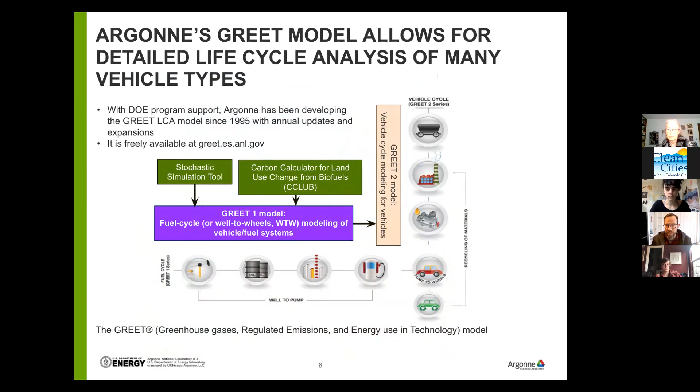That tool allows us to look at all of the energy and materials that go into cars, right? So you have gasoline in a conventional combustion engine vehicle. And that gasoline is extracted from the earth, it's processed, it's refined, it's moved to a distribution site where it's then, you know, eventually put into your vehicle, and then you drive it. Your vehicle is comprised of lots of different materials, a lot of steel, a lot of aluminum, things like that.

But now, as we talk about battery electric vehicles, we also have battery materials that we have to be concerned about. And so we look at all of those. We have all of that information available from public documents, from technical analyses that we've conducted, and collaboration with OEMs, original equipment manufacturers of vehicles, with a lot of industry groups and things like that. So if we go to the next slide.

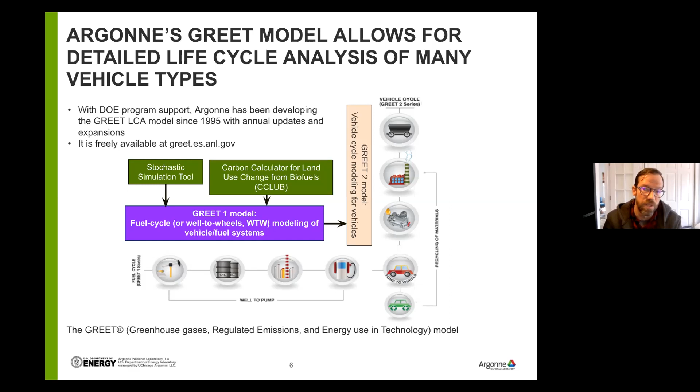When it comes to batteries, the big issues that we're seeing are lithium, nickel, and cobalt. The 2 main battery chemistries that we're seeing in light-duty vehicles are variants of the NMC, which is short for nickel, manganese, cobalt. So the precursor to all of those is that there's a lithium in front. So it's lithium nickel manganese cobalt oxide cathodes. But the variants of NMC are just how much nickel, manganese, and cobalt are relative to each other. The other is NCA, which is nickel, cobalt, aluminum. And those are the Tesla batteries. So just so you know what we're looking at, those are the different chemistries.

So most folks, I think, at this point have started to hear something about the issue of cobalt. It's a key element in those different battery chemistries. And there's a worldwide effort to reduce it for a number of reasons. One is that it's mostly sourced from a politically fraught environment, that being the DRC, the Democratic Republic of Congo, which has political issues, human rights issues, and all of those things, outside of any sort of moral observation on any of it, it creates volatility.

And the last thing that OEMs want is volatility in prices. They like assurances. And so that's one issue. And it also creates potential for scarcity. So those are things that are a concern.

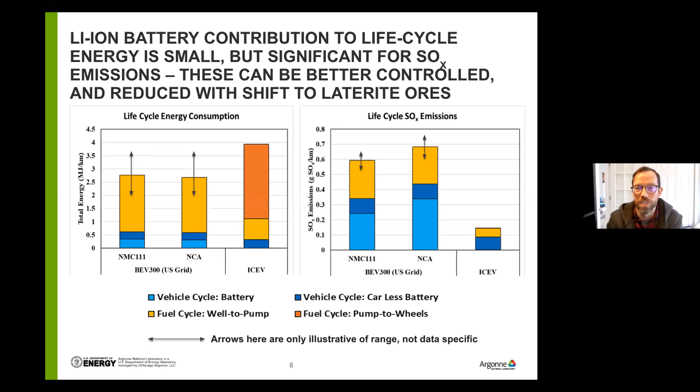And I present these two figures to highlight something. If anybody tells you that they are more sustainable, they're not telling you the whole story, because it's always a multifaceted answer. Sustainability is always multifaceted. Are we talking about greenhouse gas emissions? Are we talking about SOx emissions? Or what are we talking about? So we have to be very careful in how we talk about it. And I think sustainability being lumped as a single term can be an oversimplification. Next slide, please.

So we've looked then also at the issue of equity, and in particular, how used plug-in electric vehicles can be a form of improving low-income household mobility. So how can this be a platform?

And what are the barriers towards this low-income household mobility through used PEVs? And what are the potential incentive programs out there?

So just broadly speaking, this figure was developed by one of the researchers at Argonne, showing simply the savings that American households received over the course of just a 2-year stock weighted difference of the vehicles that are operating in the US. This isn't related to electric vehicles, but what you can see is that $8.2 billion were saved in just use phase spending by Americans from 2016 to 2018, based on improvements in fuel economy.

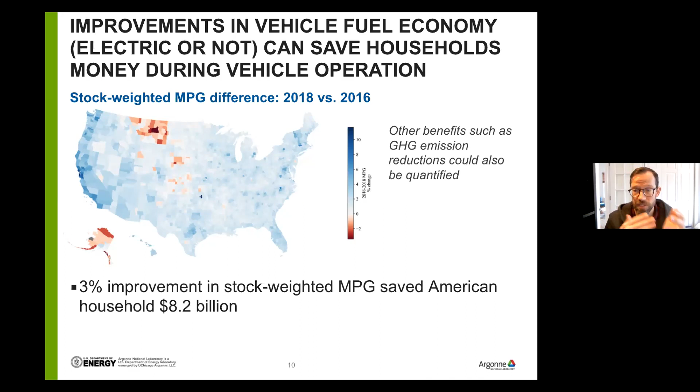And you can imagine that if you have an ICEV, that you're going to improve significantly more if you move up to a battery electric vehicle, because their electricity is less expensive, and on a use phase basis, they're less expensive to operate.

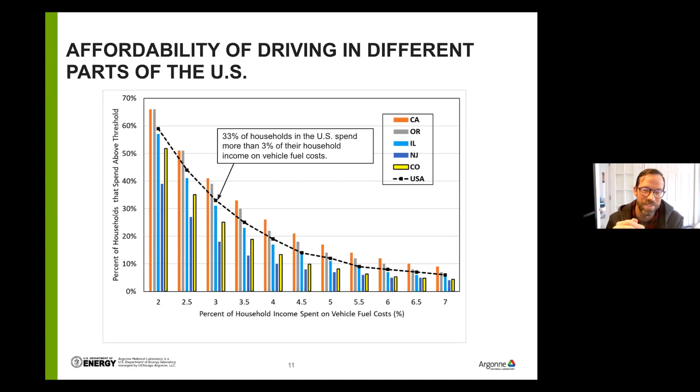So when it comes to used PEVs, a little more specifically, the issue here that sort of motivates some of this is zero vehicle households are most likely to exist for those households that are at or below the poverty level, the federally mandated identified poverty level.

And so the thing that we know about transportation is that it's crucial, right? It's crucial to obtaining important services and amenities. And I think most critically is it's really imperative to be able to get to employment. So that's one critical aspect of why this is something that we're very interested in.

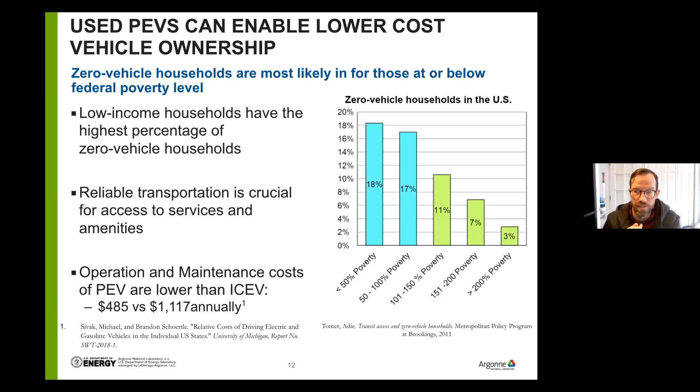The other thing I think that helps motivate this is, as I alluded to before, is that the operations and maintenance costs of plug-in electric vehicles are lower than they are for ICEVs, and significantly lower, meaningfully lower.

Now, if we look at the used EV market, I just went and looked at Carfax, grabbed a nationwide sample, and looked at a 2017 Nissan Leaf compared to a 2017 Toyota Corolla. Everything that I looked at was under 30,000 miles with no accidents, and what were the lowest available pricing groups, not just a one-off that's really cheap, but pricing groups. And you can get a 2017 Nissan Leaf for $9,000. You can get a 2017 Corolla of the same specs basically for $11,000.

So you're actually able to get into a used PEV for less money than you can get into a used ICE vehicle. And I'm not saying that $9,000 isn't a lot, especially as I was highlighting for households at the poverty level. But it does highlight that used EVs don't have the same sort of burden of upfront costs that we think of when we think of BEVs.

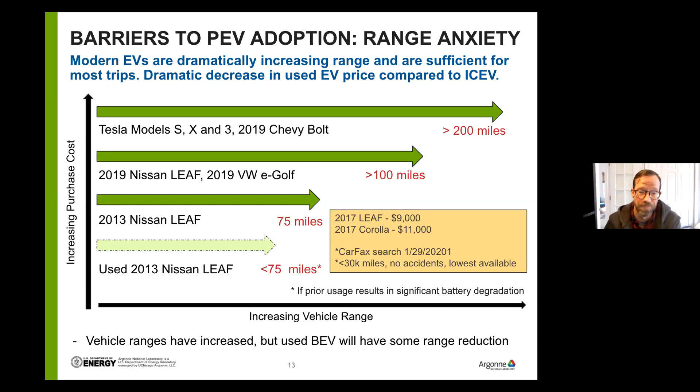The other really, really big issue that's been highlighted over and over again is the availability of charging, right? So charging is largely something that's available to households that are single family detached households and some sort of attached kind of household opportunities. But when we think about apartments, when we think about multi-unit dwellings, those are more likely correlated with low-income households, and they're the least likely to have available charging.

And so the only thing available to those folks is public charging. And so expanding charging availability at multi-unit dwellings is one thing that can be highlighted as a must-do if we want to talk about opportunities for increasing equity in this area. And I highlight that, but I think it's also really important to engage with those communities to make sure that we're addressing their needs.

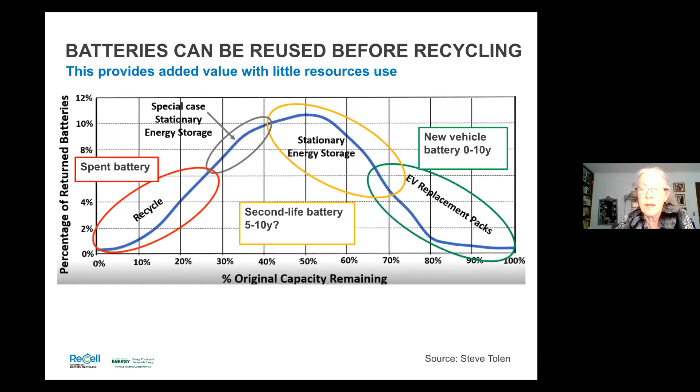This is all consistent with the circular economy. You want to be able to keep materials in use as long as you can to minimize the life cycle impacts of whatever it is you dug out of the ground and have been using. So reusing something is a lower impact activity than breaking it apart and recycling it.

Each of those layers is a different material, which means recycling it is much more complicated than just recycling your magazines or something like that.

You can put a single cell in something like your phone. You might have two cells in your laptop. In a vehicle, you've got a bunch of cells put together into groups called modules, and those modules are put together into a big pack.

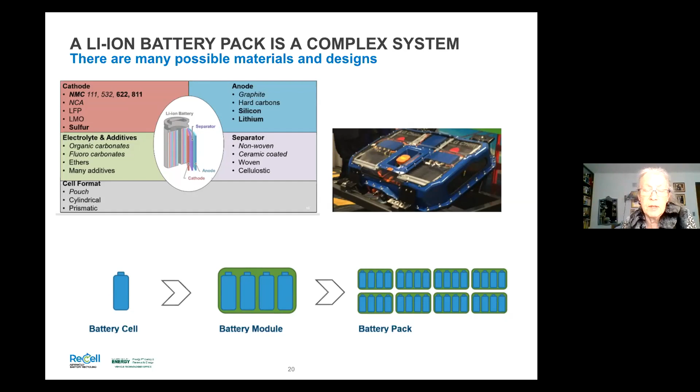Once a battery gets to its end of life in your vehicle, people need to test it and see how good it is so they can figure out where to go. What's likely to happen is you'll take the battery pack apart into modules, not all the way down to cells, because that ends up being very labor intensive. A Tesla might have something like 5,000 cells, and they might even be glued into the module, so taking it apart is just not going to be worth the money in labor.

So the modules then get graded to see which ones are good. If they're really good ones, you can put them back into a battery pack to put into a car whose battery has failed, or you can put good modules or less good modules into a second life application, depending what you want to do with it. Or if it's not really very good at all, you'll just send it to recycling directly.

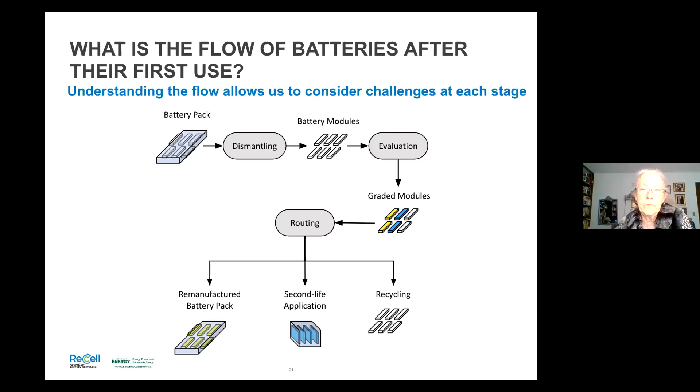So what do you do with a second life battery? One thing you can do is put it in a big stack of batteries and give it to the utility company. If you've got solar energy building up during the day but really need power at night, you can store the energy in this pack of battery packs.

Or you can take it and put it in a remote charger. If you do that, you can again store solar energy you've collected during the day and charge batteries at night off of this charging station.

One idea we had, which you're welcome to try and we can help with, involves a bus company that's putting in electric buses. They have enough charging stations in their depot to charge something like 6 buses, but they're about to get more buses and don't have the capacity. If they put in more chargers and used grid power all at once to charge the batteries, they might run into extremely large demand charges for taking a lot of power at the same time.

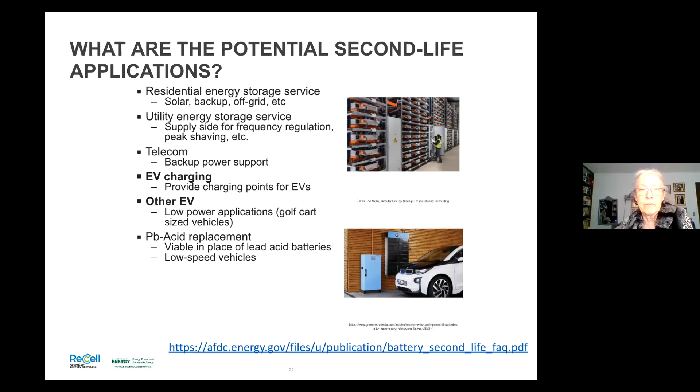We were also asked what happens to batteries that reach their end of life. First, note that in the United States, essentially all batteries that have reached end of life so far are from portable electronics. There haven't been that many EVs in service for 10, 12, or 15 years, so they haven't really gotten to their end of life.

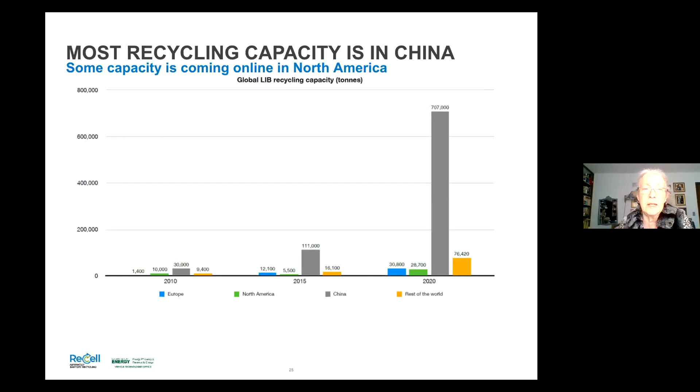And the interesting thing also that comes straight out of the math is because the growth of electric vehicles, and because of that battery manufacture, is so rapid, it turns out that recycling plants will have for quite a while now as their main feedstock scrap from manufacturing. And that's just because there's so much more material being manufactured right now compared to 10 or 15 years ago. Next.

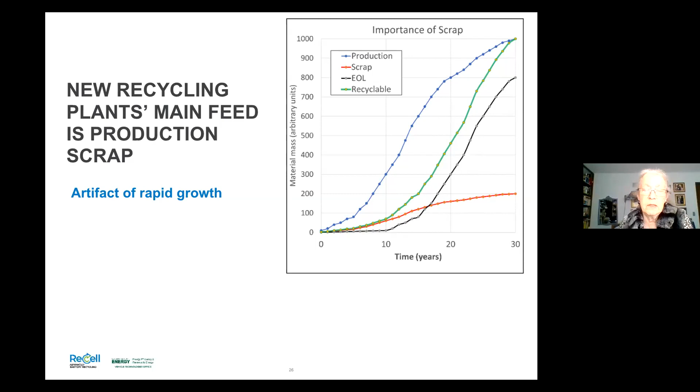So Jared mentioned cobalt. One of the main functions that DOE has in order to reduce the US dependence on critical materials is to reduce the amount of cobalt in batteries. So that's a major research effort for the Department of Energy. They've also got a battery recycling prize. Basically, when we started looking at how the batteries were going to be recycled, they figured out that you didn't have to worry about how they were going to be recycled if you couldn't get them back in the first place. So the battery recycling prize was established to figure out how to get all of these batteries back.

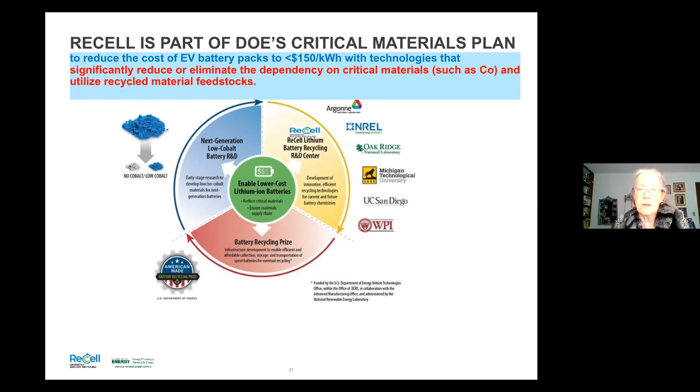And finally, the third part of their program is our ReCell Center, which is a $15 million over 3-year collaboration with 3 national labs. Argonne is the lead lab. NREL and Oak Ridge also have important parts. And we also have 3 university partners that are doing very interesting work. And the center's mission is to come up with an economical way to recycle lithium-ion batteries from vehicles within 3 years, start taking cells and recycling them to get new cells. Next.

Now, it's not that nobody knows how to recycle batteries at this point. There are 2 commercial processes. Pyrometallurgical processing: basically you take the battery, you throw it into a big furnace, treat it like an ore, and you get back to that refining stage. Or you can take the battery, chop it up, dissolve it in strong acid, and you can get back precursors to battery materials.

What we want to do is actually get back the valuable internal materials from the battery with their crystalline structure intact so that we can avoid doing the energy-intensive steps that need to get repeated from the other processes. And that again is one of those smaller circles that's better for the environment from the circular economy methodology. So we're working on that, and we've got a number of processes that we're working on to get material back that will be attractive to battery manufacturers. Next.

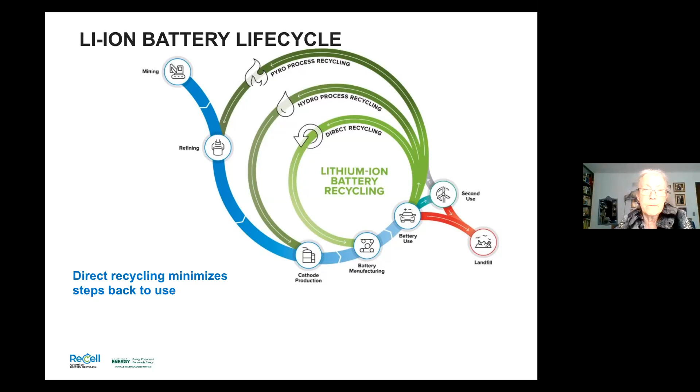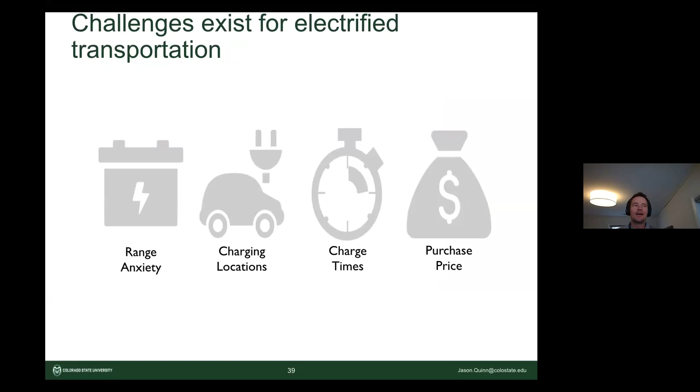So a lot of you, especially in the first poll, right, on the next slide, have identified the issues. And if you click through these animations, they'll show up quickly, right? They're all the things everybody knows and loves, right? Can I afford it? Where do I plug it in? How am I going to get there, right? And these are all real things. The problem is that a lot of what we perceive isn't necessarily reality, right? In terms of range anxiety, for example.

COVID's unique, but I think the furthest I've driven during COVID is like 3 miles, other than going to the mountains to ski, right? But you know, otherwise, I'm just really wearing out the sidewalks these days.

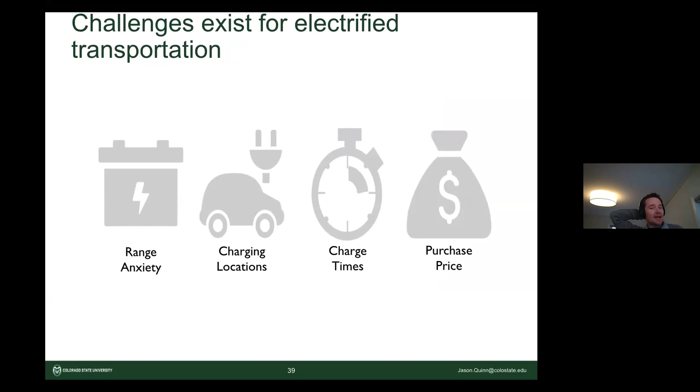This is in-motion wireless charging. And so the concept is, like I charge my phone on a pad wirelessly. Well, let's just elevate it and just drive it at 75 miles an hour across the interstate. Kind of a cool concept. A lot of challenges, but something that's kind of cool.

And it addresses a lot of those anxiety things that we've talked about, but it's a huge infrastructure investment. But it's okay, we've been there before. So what are we doing to investigate this?

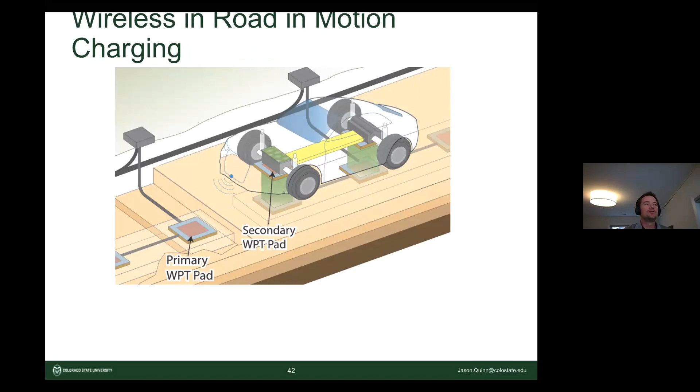So if we click forward 2 slides, my work focuses on the optimization of systems considering sustainability. So I'm really grateful to the DOE for 2 reasons. One is they give us a lot of money to look into this, but 2 is no matter who is in the administration, they care about 2 things. It's a matter of what comes first: economics and environmental impact. So the last 4 years, it's been in that order. In the next 4 years, I'm predicting it's going to be environmental impact and economics. But this is the core expertise that we play in.

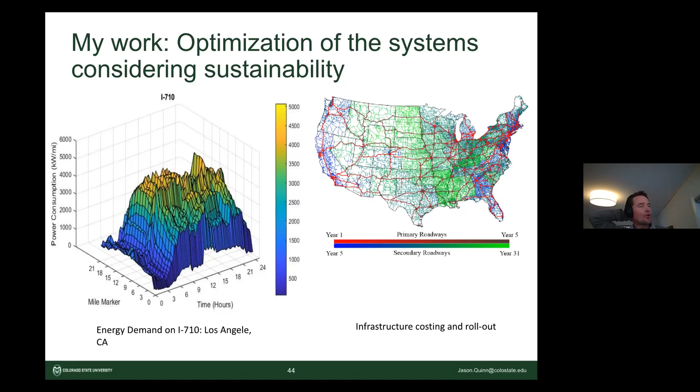If we go to the next slide, we're going to talk about environmental impact. So just confirming everything Jared said, hey, SOx, it's an issue, right? But GHGs are not. And so it depends on what we care about. So if we click go again, check it out. Here's the answer for the takeaways, right? Yep, there's a huge reduction in greenhouse gas emissions. But as Jared said, that's not the whole picture. It's a big part of the picture. And so as we move forward, we can start to use this information to try to make intelligent decisions.

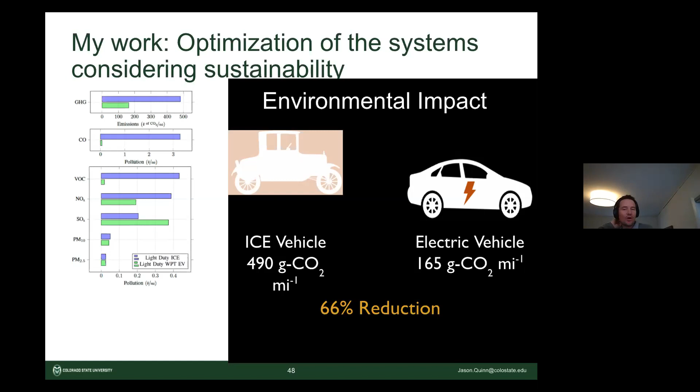And so what I'm trying to convince you here of is that the future is uncertain. There's no doubt. If I knew what it was going to look like, I'm not going to lie, I wouldn't be here hanging out with y'all, right? But that's one of the reasons why we do the work we do, is we're trying to look at what the options are and what's going to be ideal.

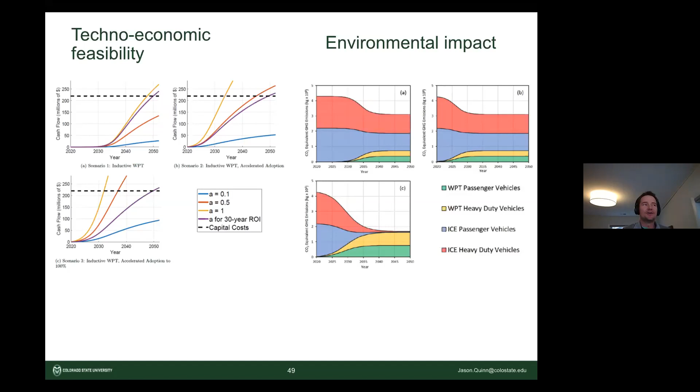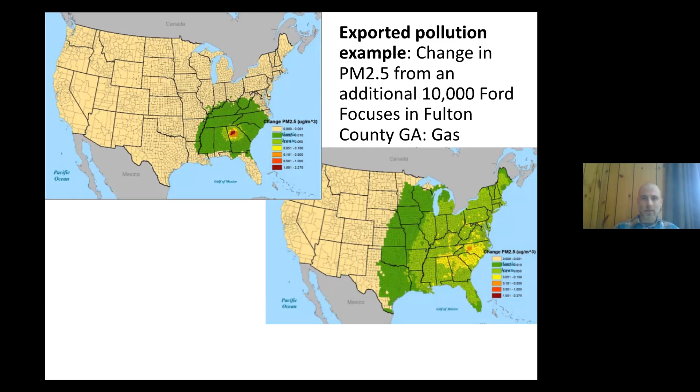Okay, so the bottom line policy result, if we're thinking about how to incentivize purchases of electric vehicles, is the optimal EV subsidy should be equal to the difference in lifetime damages between an electric vehicle and a gas vehicle. So if we were to subsidize electric vehicles, economic theory would say that we want to make a person just indifferent between purchasing the gas-powered versus electric vehicle, maybe pushing them slightly over to the EV side. And this paper asks, what are those lifetime damages and how do they differ by region of the US?

Oh, I see. Gotcha. Screen now? Mm-hmm. Good to go. Sorry about that. My sincere apologies. You go through Zoom, Teams, Blue Jeans. They're all different in what you do.

Okay, sorry about that. So what I was pointing to is PHEV30, BEV, and ICEV right here. So these are just the greenhouse gas emissions. So you can see that they are very comparable in terms of the energy. And I'll throw a link to this paper in there. But we've got more up-to-date versions of this too. This was just easy to access.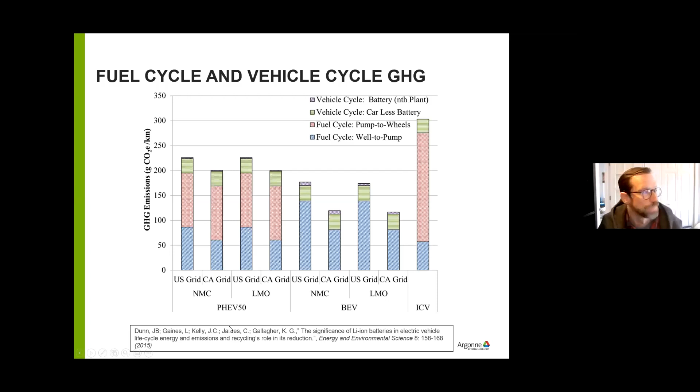Great. This might have been directed at Linda, but maybe all of you have an answer for this. What other chemistries or materials are being explored in lieu of cobalt? Well, the Nissan Leaf was a lithium manganese oxide chemistry, so there's no cobalt in that one. A lot of the Chinese cars and some of the ones that Tesla says it's going to make are lithium iron phosphate. Again, no cobalt. But for high performance passenger cars, nobody has yet produced one that doesn't have any cobalt in it.

The Chevy Volt was an NMC 111, which meant it had equal amounts of cobalt, nickel, and manganese in it. What they're moving towards now is, as Jarod mentioned, higher nickel, and a typical one that people are talking about is 811, which has 8 times as much nickel as cobalt or manganese. And in fact, DOE's doing some research on chemistries that have half as much cobalt as that in them.

So it's coming. I don't know how much cobalt's really going to be used when, but one thing to note is the total amount of cobalt that we're using, even as the amount per battery decreases, is still increasing because the number of batteries is increasing so fast.

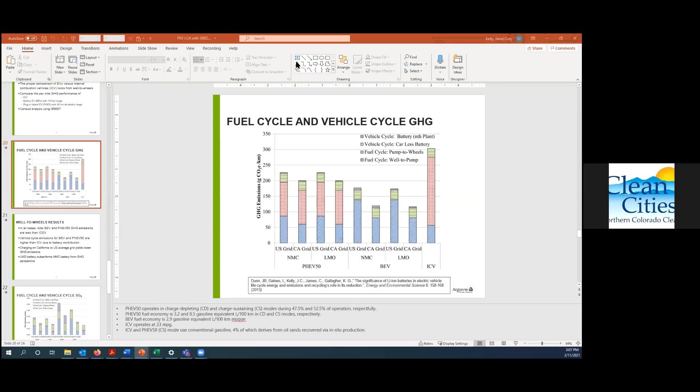I think that's a great point. And I would add, we want to be mindful of where we put infrastructure as well. Even with concerns of gentrification, we need to make sure every community has access to charging. Jarod, that's a great point about access to EVs, because why build the infrastructure if accessibility to purchasing or owning an EV or used EV is too out of reach? If we can combine both of those efforts, we can try to come up with some solutions that way. One thing that just popped into my mind is Blue LA.

I'm not super familiar with it, but from what I understand, they have some sort of shared EV program in Los Angeles that has greater access in low-income communities, and some sort of reduced cost to the system for low-income households. But I'm not super plugged in on it.